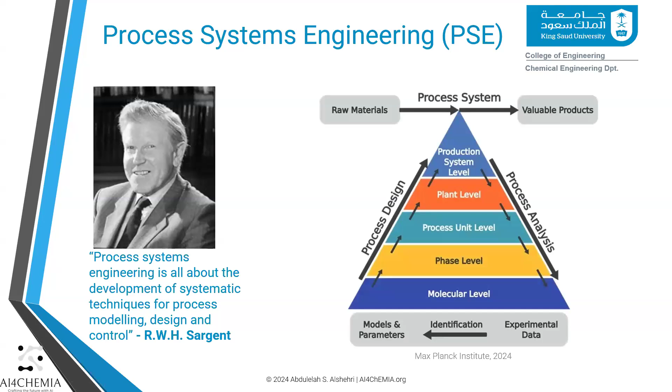And this is to develop an integrated multi-scale system that can deal with the multi-level structure of chemical production systems, starting from the molecular level to the plant and the enterprise level. And overall, this discipline leverages systems engineering and systems thinking to streamline and innovate in chemical engineering and chemistry as well.

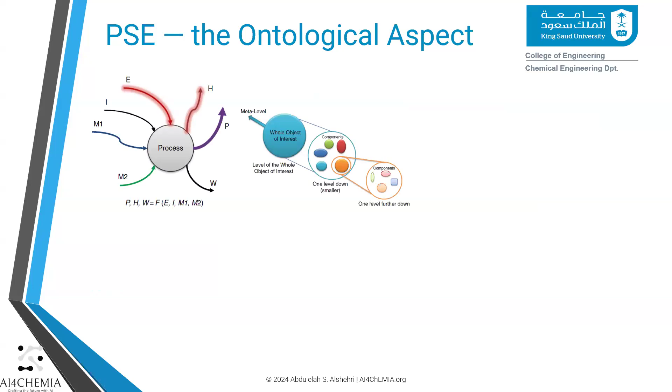So there's also an ontological aspect to PSE or process systems engineering. That is, we try to model what exists and what makes up reality. Any whole process can be comprised of multiple components, which in turn can be seen as whole processes on their own, or even at a smaller scale, they may have internal processes and so on. At the end, we find ourselves with process systems or subsystems that interact with each other, and we try to understand their behavior and their interactions by modeling them.

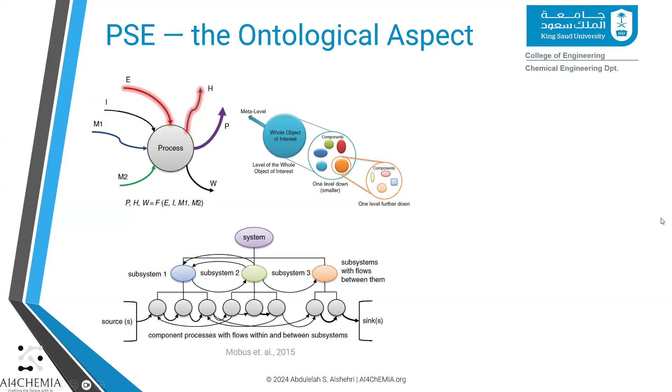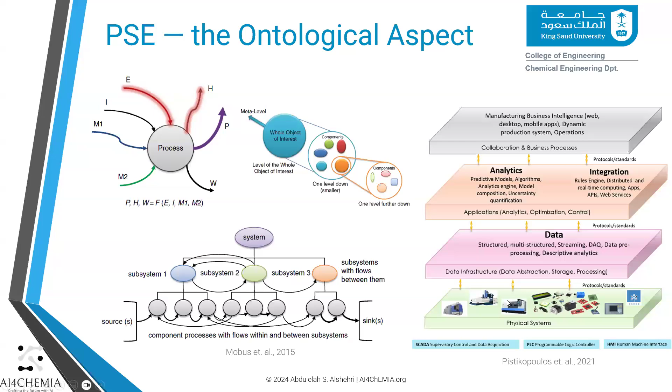There are also multiple layers to these subsystems or superstructures, in a way that they have the physical system itself. When we model it, we consider handling the data, the sensors, the applications, as well as the operations, and even going as far as the business side of processes. So AI in general is not really new to PSE. In this discipline, researchers and practitioners have always sought to leverage a smarter way to understand these systems and their interactions.

The first phase was sparked by the 1982 paper by the MIT professor George Stephanopoulos, and was focused on expert systems that aid in decision-making by decomposition methods, that is, to find patterns or structures consistent with the current data to guide future actions. The second phase was what we call predictive machine learning, from 95 to 2015, where researchers applied classical machine learning methods like support vector machines and shallow neural networks to process control and QSPRs, or quantitative structure property relationships, for the most part.

The third, or the current phase, is generative AI, or LLMs, which also represent the current grand challenge for science and engineering at large. And in all of these 40 years, AI wasn't really that impactful to the field of PSE. So before we develop new applications of AI in PSE, we need to ask ourselves, what's different right now?

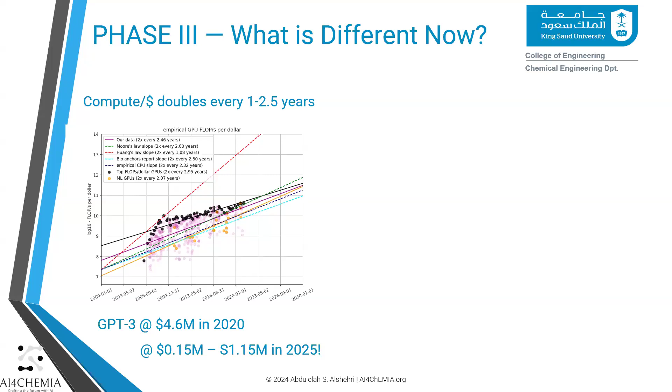However, it is equally important to recognize that while the cost is expected to significantly drop in the next few years, there are also other limitations on the scaling of LLMs beyond computing power, with the most significant being data. So to continue scaling to 2030 alone, we need an 80,000 times larger data set, which is not really conceivable unless we use some data synthesis techniques, which current LLMs are not really great at.

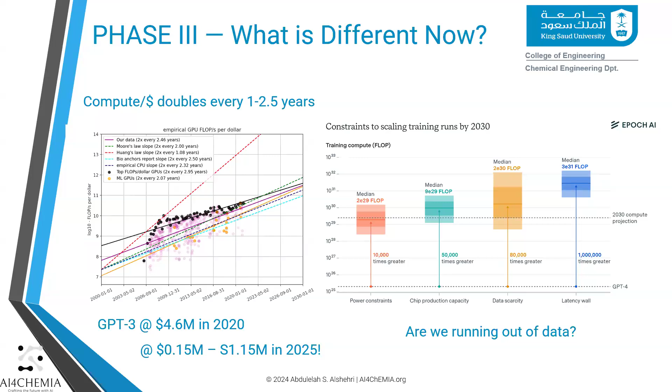So the next question is, why is this really important to PSE right now? PSE researchers have always been reductionists, trying to simplify process systems to the most important parts, or isolated systems that they always assume give rise to the entire phenomena or the system behavior. But that's not always accurate.

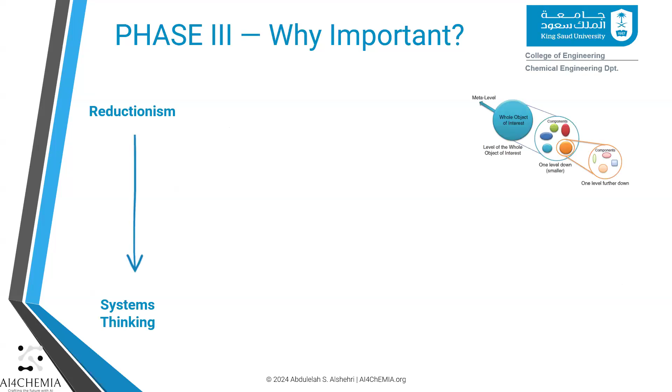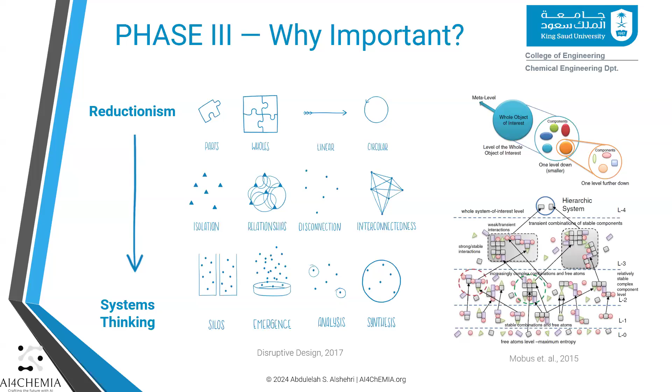With this type of compute that we're currently witnessing, we can go from reductionism to systems thinking, where we can move from modeling parts of the system to modeling the system as a whole. We can go from isolation to navigating relationships, connections, and emergence. In terms of chemical processes, we can couple the molecular level with the overall process system's behavior, instead of simply using linear relationships to model their interaction, or dealing with them disjunctively.

So in this talk, I'll give more focus on the areas that we covered in our recent review paper, Gen AI and Process Systems Engineering, the Next Frontier, which would include the design aspects of PSE that incorporate molecular, product and process designs. It also includes optimization, which involves navigating uncertainties, approximations, and methodologies. Process control, which includes modeling, sensing technologies, and fault detection. And finally, life cycle assessment, or any type of environmental assessment aiming for the quantification of impacts.

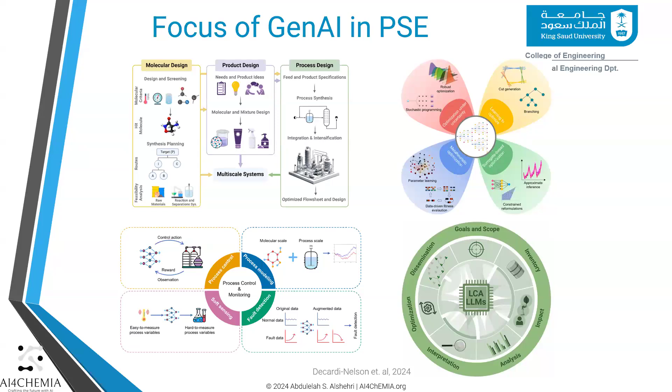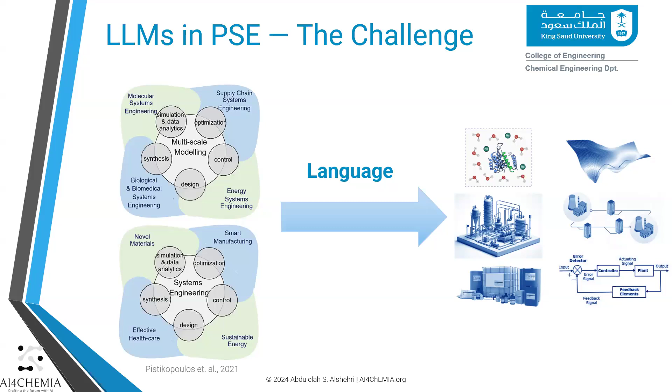So as I see it, the challenge of using LLMs in PSE lies in how we can convert or convey these multi-scale systems using language to give us new molecules, new products and processes, and action towards the optimal planning, operations and design of chemical processes, using only language to represent the complexity of such complex systems.

This is also an intrinsic challenge to autoregressive large language models, in which using words or tokens only may never approximate human understanding. Critical investigation of LLMs in psychology and in computer science have found major flaws in how they plan, or how they dissociate thoughts from actions, or logical reasoning.

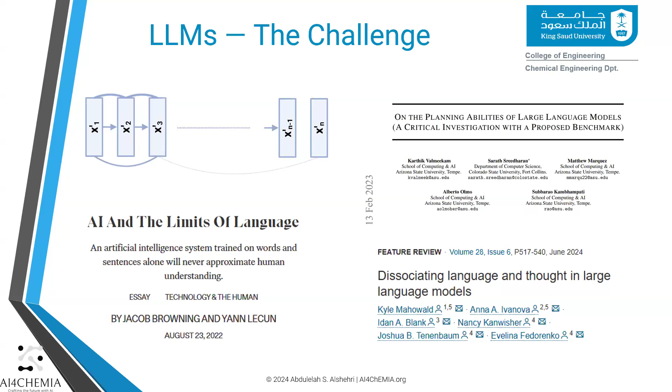So these challenges have constrained the current applications or the frontiers of PSE applications and LLMs to unimodal ones that use only language to perform design tasks like featurizing molecules and their inverse design, also generating contextual optimization models and mathematical reasoning.

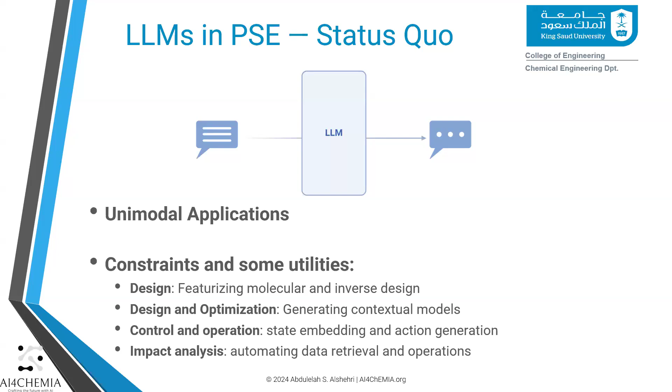In control and operation, we also see that they are used to contextualize states, embed them, and take actions accordingly. In environmental analysis, they're mainly used to extract data and operate on them using other libraries, or platforms that connect them to Python or any other language to do the processing, estimate impacts and give feedback. In the next slides, I'll go over some of these examples that are not my works to derive insights about the future of LLMs in PSE.

So in molecular design, LLMs are actually at quite an advantage because of the presence of text-based representations like SMILES or SELFIES. A great investigation by a paper of one of the earlier speakers, Kevin Jablonka, has attempted to test the limit of LLMs in molecular design, classification, regression and inverse design with some interesting findings.

They found that LLMs can excel in regression and classification tasks, and somehow they even exceed classical machine learning methods like random forest. However, in inverse design, they found that as they amp up the creativity or the novelty scale, or the temperature, LLMs tend to generate invalid SMILES, unlike VAEs or reinforcement learning methods that can generate 100% valid SMILES.

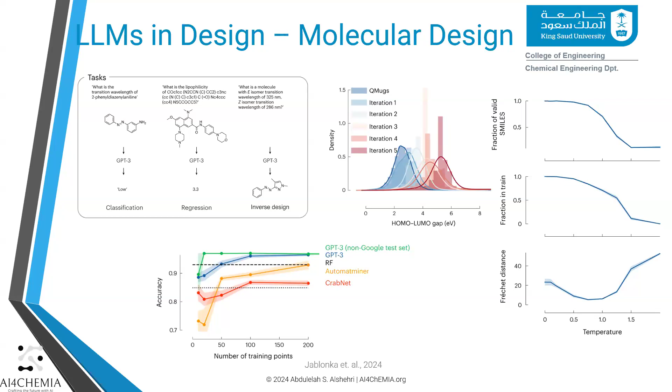Other examples in molecular design have also applied LLMs to featurize molecules or materials and yield some improvements in featurization and feature selection over just using the molecular structure or the material structure as a feature, with their average improvement roughly hovering around 10%, which is quite significant.

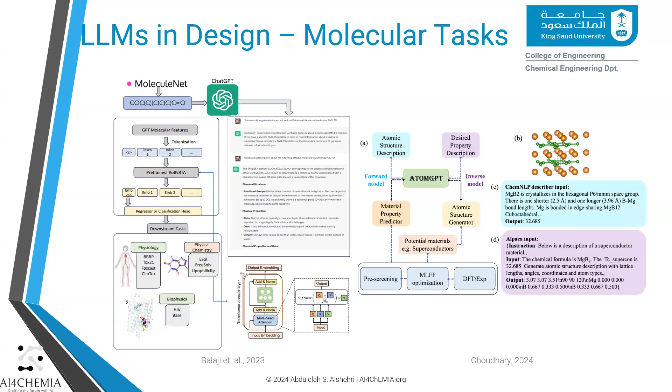So for process design, or the entire process flowsheet design, LLMs have not been applied yet, but some approaches leverage other generative AI methods like generative reinforcement learning and autoregressive methods, which is the underlying mechanism in LLMs. But there's one example here for process improvement, where the authors found that GPT-4 can improve chemical flowsheets and perform decent reasoning in the unit operation space. It was shown that it can improve conversion, operating conditions, process feasibility, and techno-economics.

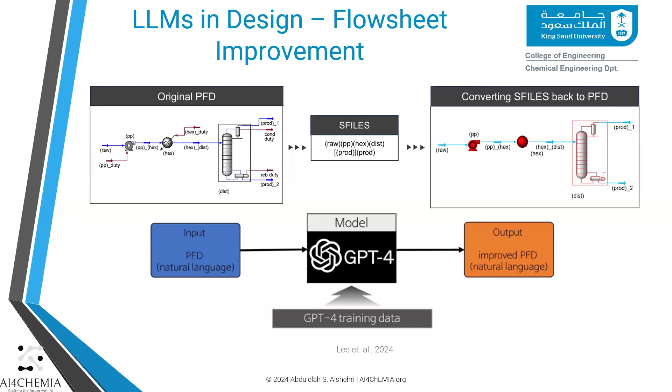So moving on to the role of LLMs in optimization, which is a similar domain to mathematical reasoning, widely investigated by the computer science community in the literature. One of the significant papers in this domain came out last month and concluded that the current LLMs are not capable of genuine logical reasoning. Instead, they attempt to replicate the reasoning steps that they observe in the training data.

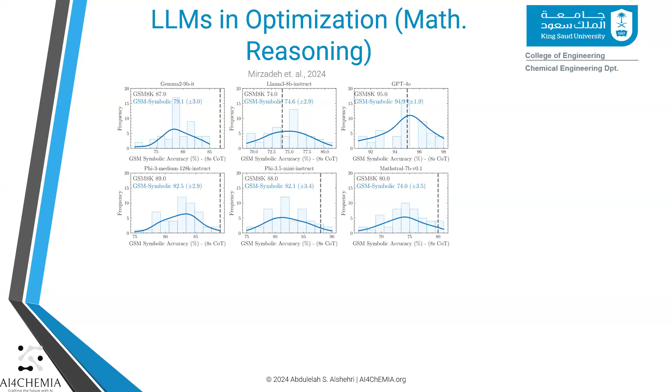These results are based on grade school math, so it's highly likely to be worse for complex representations of mathematical systems and process systems. At the same time, and paradoxically, LLMs have been reported to find new heuristics or search algorithms that improve on current baselines. So we may have to look into the underlying theories and proofs of what we have and instruct LLMs to generate on such grounds.

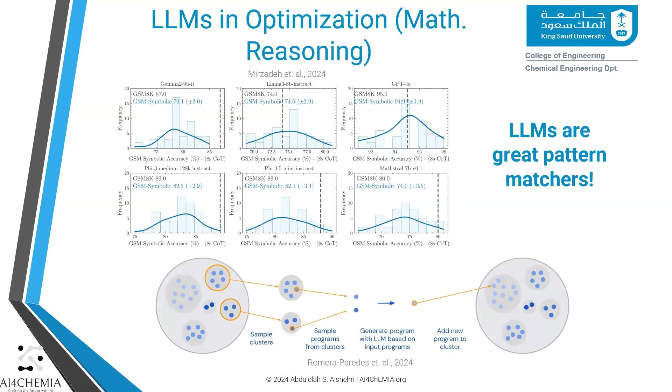So how this is useful to process systems engineering is a fair question. The answer is that we always make mathematical models and always in them make mathematical and logical errors. One of the foundational books in optimization has 40-plus errors compiled by the authors and also by the readers. And many papers in the field also receive corrections and criticism over formulation errors or practical limitations in the real world.

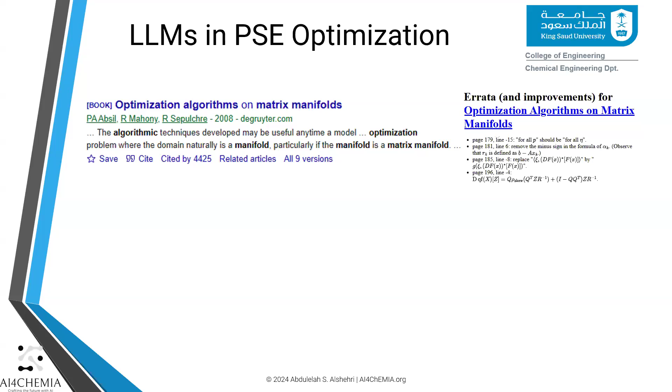It is likely that we will not realize the full potential of LLMs in optimization through feeding problem statements alone, like this paper has done. They feed the problem statement and they want the canonical form of the optimization problem at the output, and they observe an accuracy of 63%, which is quite impressive, but not there yet. And also it's not really applicable to process systems engineering. These are simpler problems and they tend to be just linear problems, not mixed integer linear programs or integer programs that are more complex.

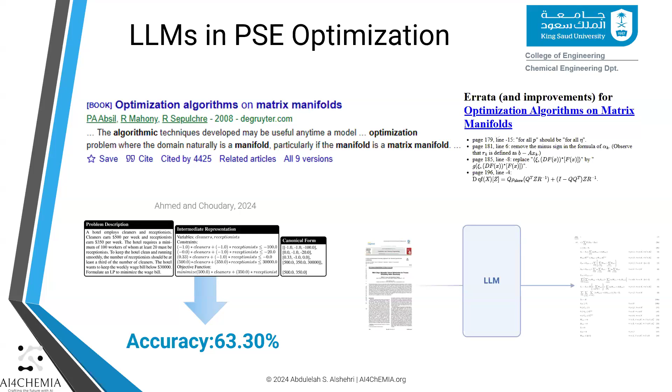But we also can build more sophisticated systems than what these authors suggested to enhance some of the formulations that we already have from the wealth of literature that we have in PSE to improve and innovate in optimization models and algorithms.

So in process control, LLMs are performing an even more complex task that is a combination of modeling and optimization. But surprisingly, LLMs have been reported to improve the teachability and control of robots and achieve up to 89% success rate. And they tend to be more sample efficient than other methods suggested to teach robots.

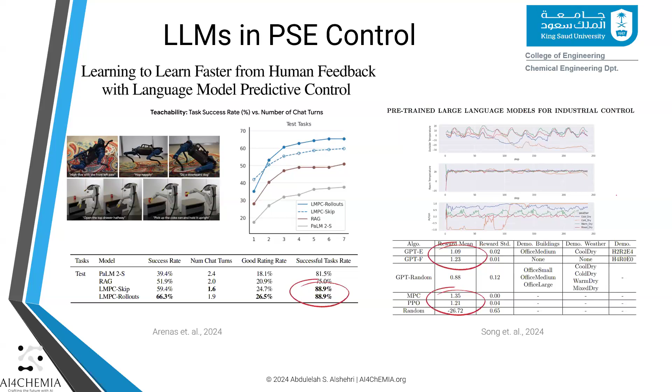And as I see it, LLMs in environmental assessments hold the greatest potential in PSE, where we have also laid out such potential in a recent perspective paper by Preuss et al. And that's because these environmental assessments have subsystems that can typically decompose without affecting each other. That is, they have sequential steps where we can, for example, define the scope and then extract relational data from the text to build the life cycle inventory and so on. So we can use some type of LLMs or general LLMs here to perform some aspects of life cycle assessment.

Early implementations of LLMs in LCA or environmental assessments have shown that they can reduce the time used to perform the impact assessment from days to minutes. But their accuracy is still far from expert-level assessment. So they have roughly 40% error in comparison to the expert-level assessment of product carbon footprint. And the method is called AutoPCF.

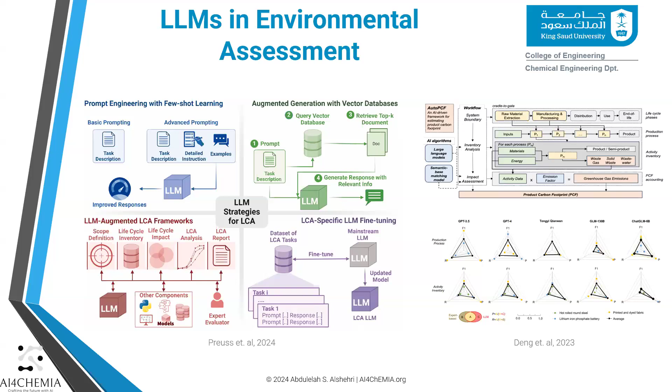So overall, it's hard to represent all the complexities that we take for granted in the real world, that we do not even really imagine require intelligence. That is, we keep hitting the old Moravec paradox that states easy tasks for humans are difficult for AI or computers and vice versa. As an example of that, it is really difficult for AI or LLMs to define or describe smells, or for robots to just pick a screw from a box.

There's no reality for LLMs beyond tokens. There's no memory, there's no planning or mathematical reasoning. They seem to just, as we discussed before, echo what they have seen. So this makes the data also a limitation, or the modality of the data a limitation. Although you may argue that it would take a human 170,000 years to read an LLM data set, we live in a multimodal world where a human child by the age of 4 will have seen 50 times as much data as the largest LLM.

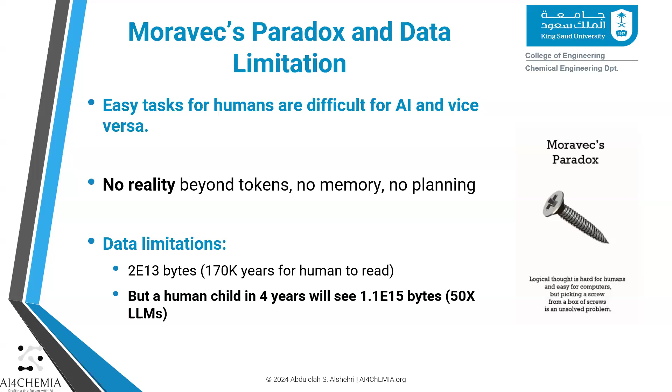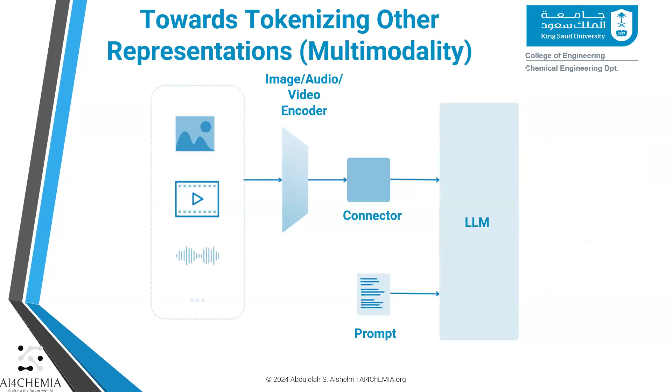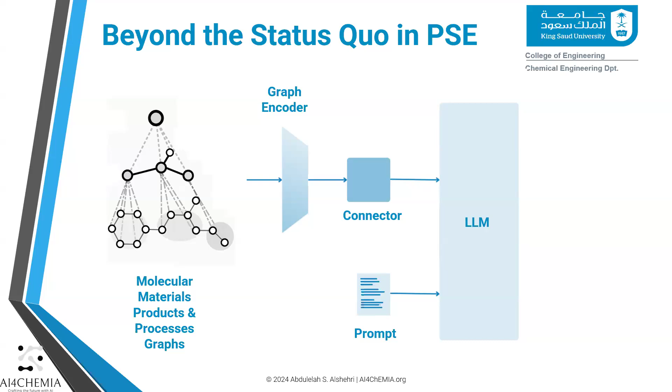So as I see it, multimodality is the path forward to make LLMs more useful for scientific and engineering domains at large, although the mechanism they're using currently is simply tokenizing images, videos and audio. In PSE, that can look like encoding molecules, products, and processes as graphs to reflect how they are represented in the real world and also avoid reductionism.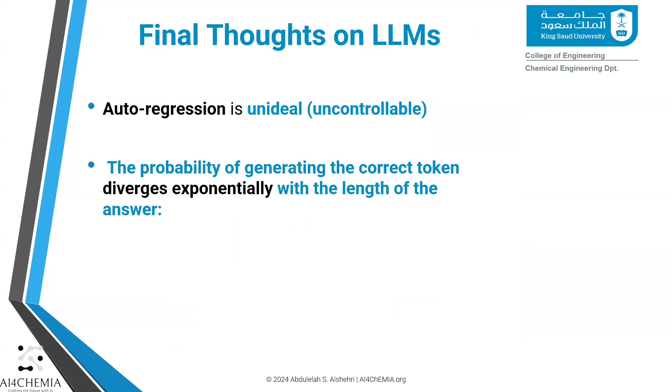So some final thoughts about LLMs. They're still unideal and quite uncontrollable. That's because of their autoregressive mechanism, where the probability of generating the correct token diverges exponentially with the length of the answer. And as suggested by one of the fathers of modern deep learning, Yann LeCun, a major redesign is needed. So until then, we have to go back to the common aphorism in statistics and in systems engineering that all models are wrong, including LLMs, but some are useful. So let's make them useful.